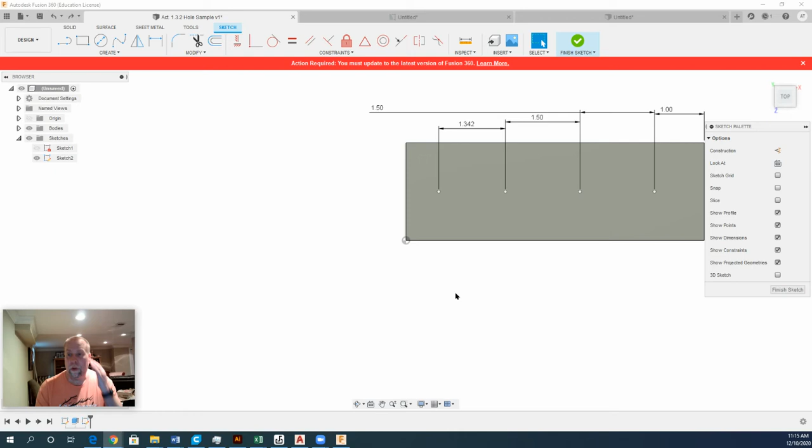All right, hey gang, so we're talking about this right here. So this is the object right here.

If you notice here, I came up here when I created it. I'm in a sketch right now, so let me finish the sketch and I'll go back into it. Once I've got the sketch created, I don't want to create another sketch, I want to stay in that sketch and go back into it.

Now I can see the dimensions and everything I need. Remember these points, that's how you do holes. You come down here and create a point, and I just added 4 points, then I dimensioned them. I didn't put a dimension here.

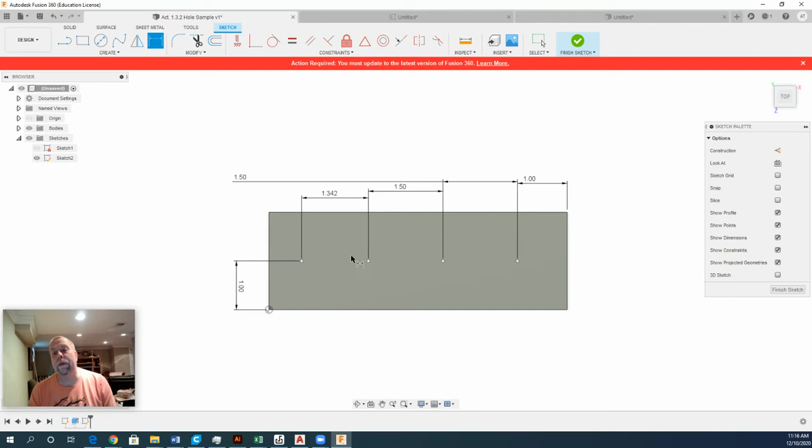I can do that too, but I made sure it was in the midpoint of it, so it was right. It's 1, hit enter. There we go, everything else is in line with it. I can dimension each one, but I'm not going to.

Now, once I get into this, I come over here and click on the hole tool, which is right here. Or in create, there's hole. Right there, where is it? Where's hole? There it is right there.

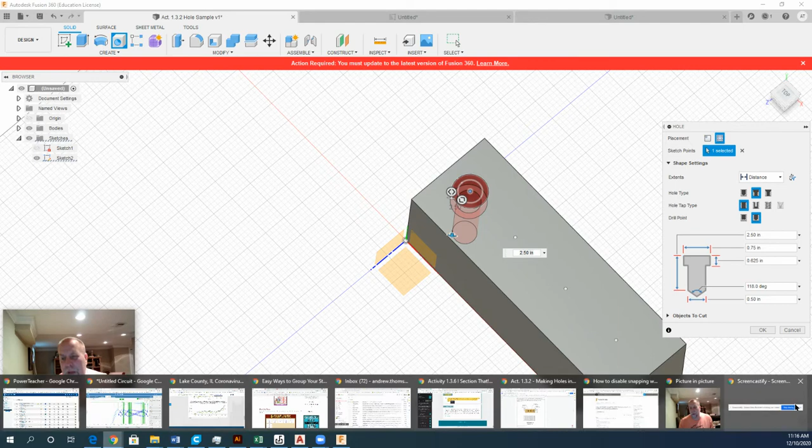Now, when I click on the hole here, it puts the hole in. Now I've got to go to the first hole that I've done and make sure that I'm... let's find it here. Where's my... there we go.

Well look at this, so it's going to be a 0.5 through, right? So do 0.5 through. I change the distance here to all, change this to just a regular hole, and then I'm going to change this to 0.5 right here.

Once I've done that, I hit OK. And now if you look, my light bulb came off my sketches here, right here. I click on the little button, the light bulb turned off, and my other holes came on.

I could create another sketch and do one hole for each one, or I can turn this sketch back on for the time being until I'm done with it. So I turn it on.

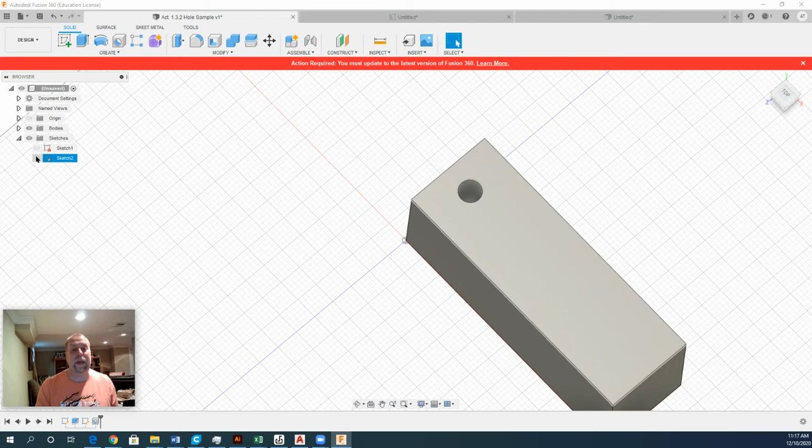I click on hole here, click on this hole here, and then I come back over here. It's going to be the counter bore type with a 0.75 counter bore.

So I change this, this is going distance, so counter bore, 0.75 counter bore. This is going 2.0, I believe. And then this one is 0.375, the one down here. 0.375.

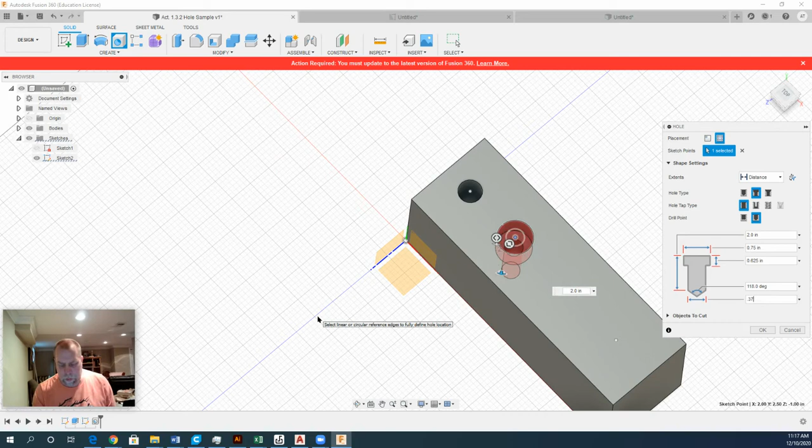Okay, and that's how I put the holes in. I'm going to stop right now, but now you get the idea. Once I finish all the holes, I'd come back here and click on this light bulb icon to turn that off. But now that the holes are there, let me go into what I was doing before. Here's the one I was working on here.

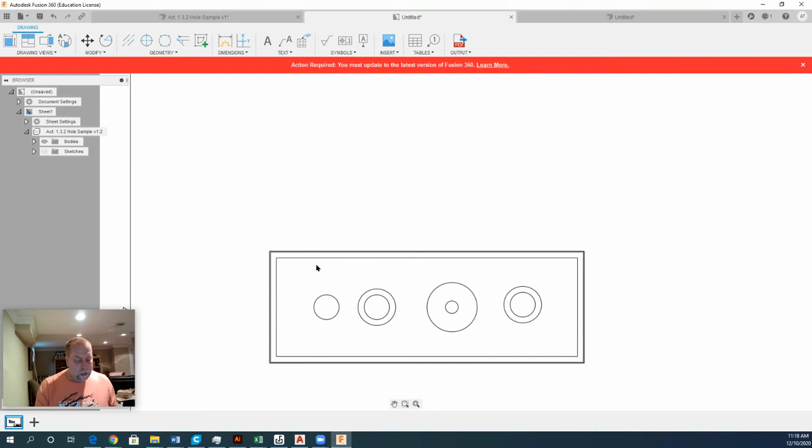And I want to show you this here, how to dimension this. Let me delete these, and I'm going to put it back in, okay? So to dimension these, I hit D or click on the dimension tool, I come up here, click on there, click, and drag out.

I'm going to do the same thing with this one just so it's all set up here. Whoops, click on this. Whoops, I missed it. There we go, drag out. Now, once I'm in here, all I've got to do is double click on this dimension here, and this panel opens up.

So this time, this one's 0.5 through, right? So all I've got to do is type in through. So I go after the parentheses there, and I type in a space, in all capitals, T-H-R-U. There it is.

Now this one's a little different, so I've got to go into this one and add stuff to it. If I look here, it's actually 0.375 down 2, right? So I'm going to go before the parentheses and go 0.375 diameter. I've got to hit the diameter symbol, which is over here, insert symbol. I come over here, diameter, and then it says 0.375.

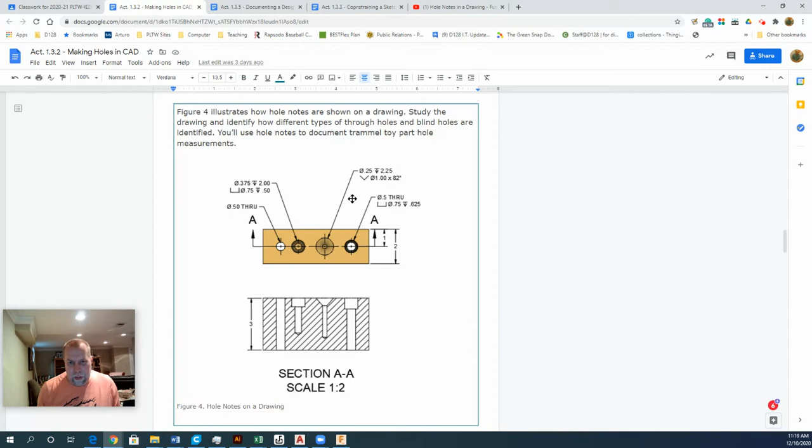Oops, I've got to click on here. I'll come back here. 0.375, hit a space, and I'm going to click on this over here to go down. And then we're going to go 2.00.

Now to go to the next line, if I just hit enter, it would finish the command. To go to the next space, so it spaces down, I hold the Alt key down, and then I hit enter while holding Alt, and now it goes down there. See how that happened?

And so now I've got to come before the parentheses to do that one there. I come before it here, and I go counter bore. If you look here, you've got your countersink, you've got the down arrow, you've got all this different stuff that you can put in there, anything you want outside of that.

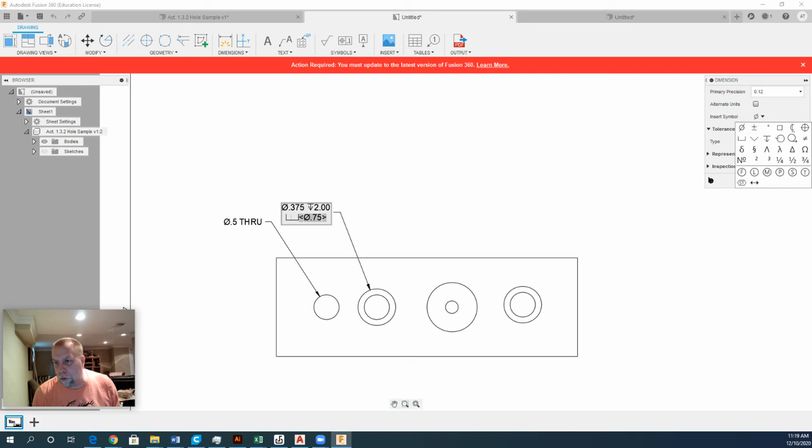And then it's that counter bore space. So I've got to put a space right after the counter bore here, space. And then I've got the diameter, 0.75, right? And then I've got to go down.

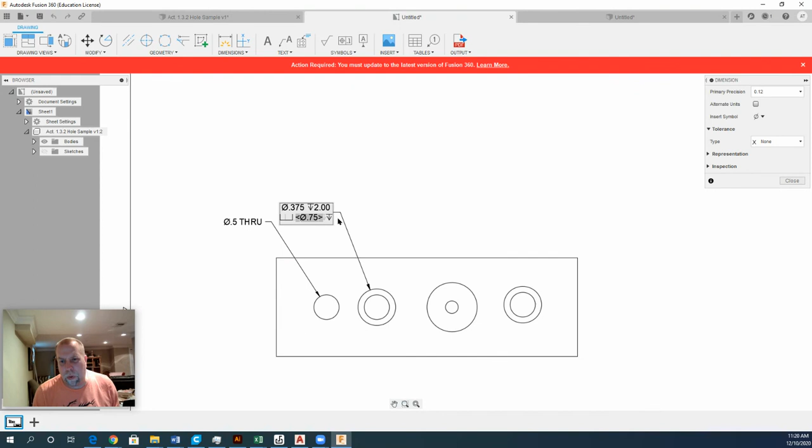So again, I come over here, hit space, and I go down. And then what is it? 2.25 -- well, no, I'm sorry, 0.5 for the counter bore. So I come over here, 0.5. And then I can hit enter or hit close, whatever I want to do, or click outside of it.

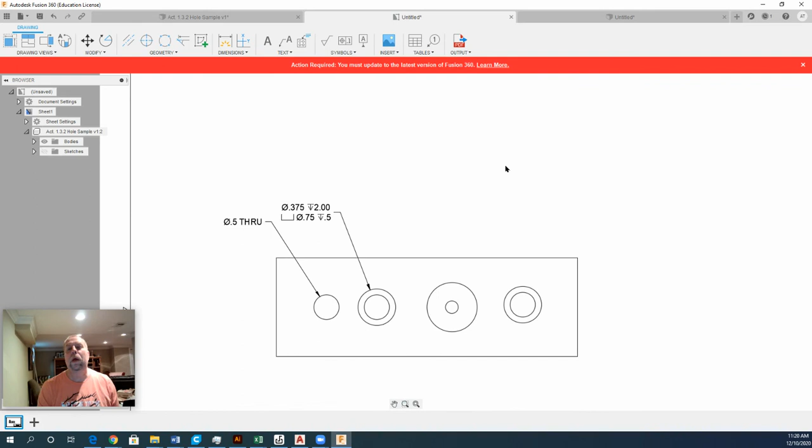And there it is, and that's the way we do this stuff, that's the way you put in symbols. Now, I'm not going to do the rest of these because you see how to do it. Just make sure you understand that when you're in here, these are your symbols, all the symbols you possibly need for this, okay? And that's it. Hope this helps.